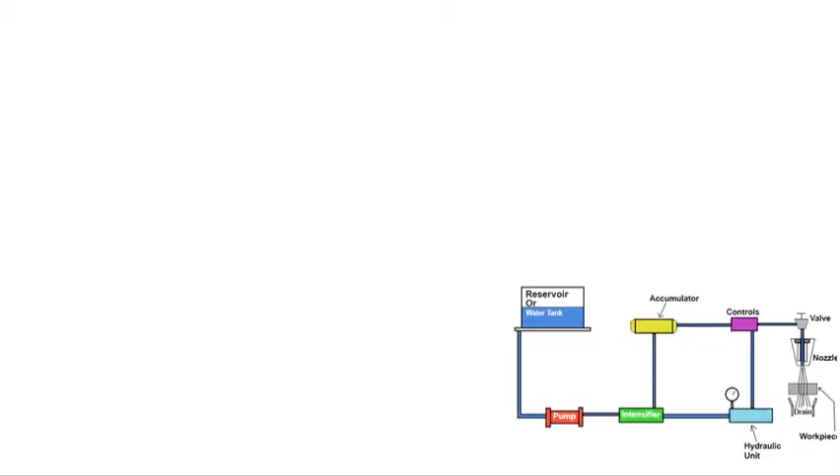18ME641 module 2, water jet machining, short form is WJM. This is lecture series 6.

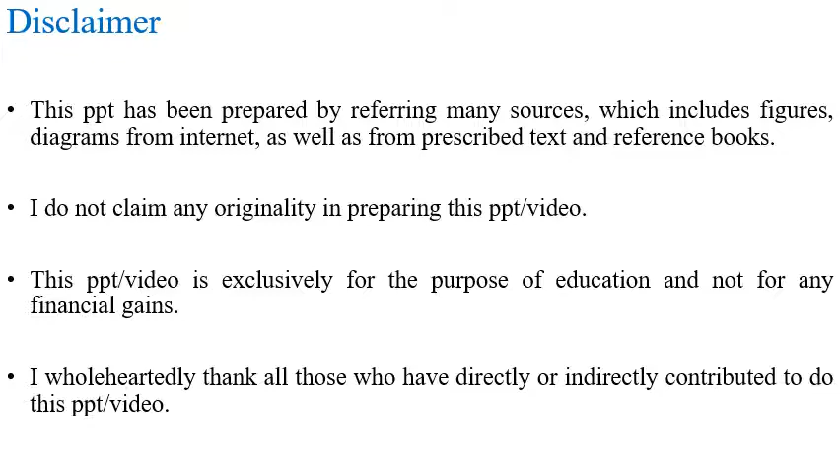Water jet machining. This is the syllabus: equipment, process, operation, applications, advantages and limitations of water jet machining. Water jet machining is good for cutting and slitting of porous non-metals like wood, leather, foam, etc. It is also used for cutting composites, wire stripping and deburring.

This process works on the principle of erosion effects of a high velocity, small diameter jet of water. Quality of the machined edge obtained during this process is usually superior to the other conventional cutting processes. In water jet machining, the water jet is a cutting tool which never dulls or breaks. This process does not generate airborne dust, hence hazards during machining of fiber composites and asbestos are minimum.

The jet velocity may be as high as 900 meters per second. Basic cutting action is performed by the tight water jet core. Interaction with air diverges the shroud around the core. Okay, this is the small introduction about water jet machining.

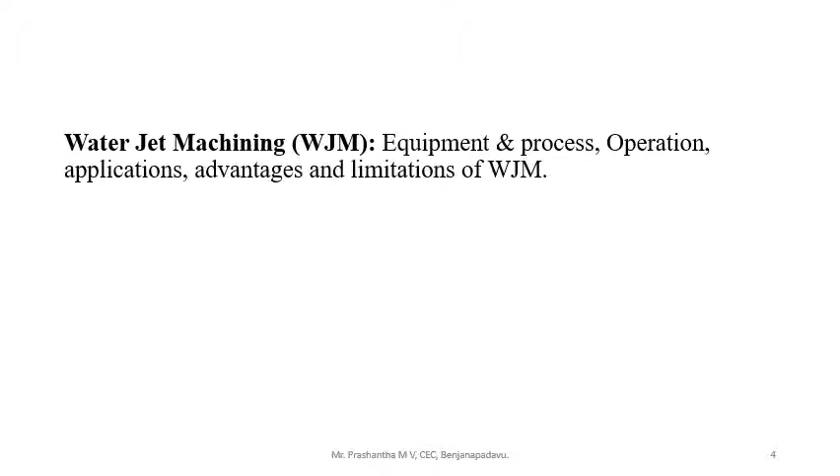Now, before going to the operation of water jet machining, we will move to the working principle of water jet machining. WJM is the short form of water jet machining. WJM works on the principle that when a jet of water at very high pressure and velocity is made to strike on the surface of the workpiece, the kinetic energy of the jet is transformed into mechanical work. The material from the workpiece is rapidly removed by the erosive force of water.

Next, water jet machining is typically used to cut so-called softer and easy to machine materials like thin sheets and foils, non-ferrous metallic alloys, wood, textiles, paper boards, fiberglass, honeycomb, polymers, frozen meat, leather, etc.

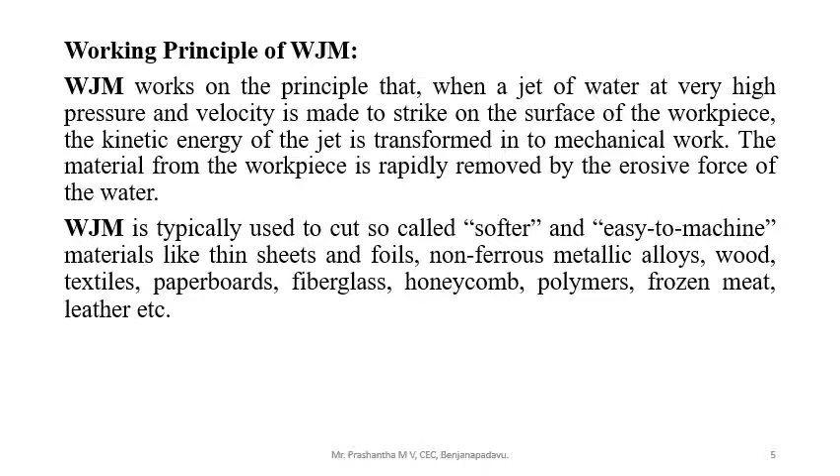Water jet machining equipment. Before going to the equipment, why the need of water jet machining? Although conventional methods can be used for machining non-metallic materials like wood, paper boards, leather, foam, asbestos, fiberglass, etc., they are not technically or economically feasible.

In such cases, water jet machining can be selected since it provides omnidirectional cutting capabilities at very high speeds with a resulting edge quality superior to the other conventional machining methods. Hence, WJM is utilized. This is the purpose or use of water jet machining. Now we'll move on to the diagram.

Water jet machining mainly consists of a few parts or components. They are the pressure generation system. Look at the entire diagram. This entire box is termed as the pressure generation system. And tubing: these entire pipelines are called tubing.

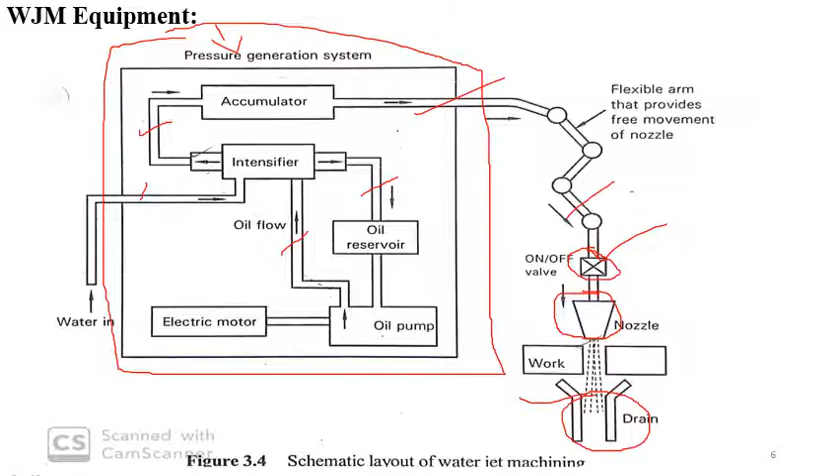And the nozzle is here, valve and catcher. The valve, see here, on and off valve. And the catcher, you can see here. This is the brief list of names of the water jet machining equipment. I will go through the functions of these parts.

First is the pressure generation system. The pressure generation system is the heart of the water jet machining equipment and consists of a pump, here the oil pump, an electric motor, an intensifier and an accumulator with necessary controls and valves.

The pressure generation system delivers a constant and continuous flow of high pressure water at prescribed pressure. Either a positive displacement pump or an intensifier can be used for the purpose. Positive displacement pumps are suitable for low and intermediate pressures up to 280 megapascal, but are less reliable for high pressures. An intensifier overcomes the disadvantages of the displacement pump and serves the purpose. So this is the function of the pressure generation system.

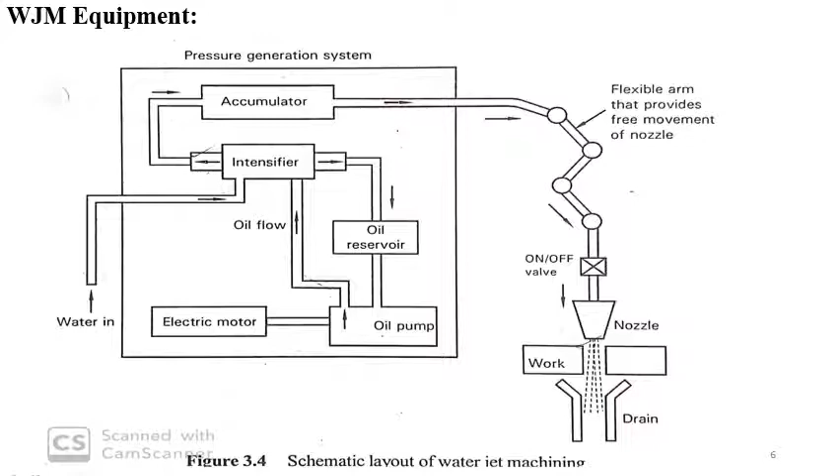In operation, filtered water from the water tank enters the hydraulic intensifier, where its pressure is increased to a high value. The intensifier then supplies high pressure water to the accumulator. To begin the cutting operation, the on-off valve is switched to on position. The high pressure water from the accumulator enters the nozzle, where the whole of the pressure energy is converted into kinetic energy.

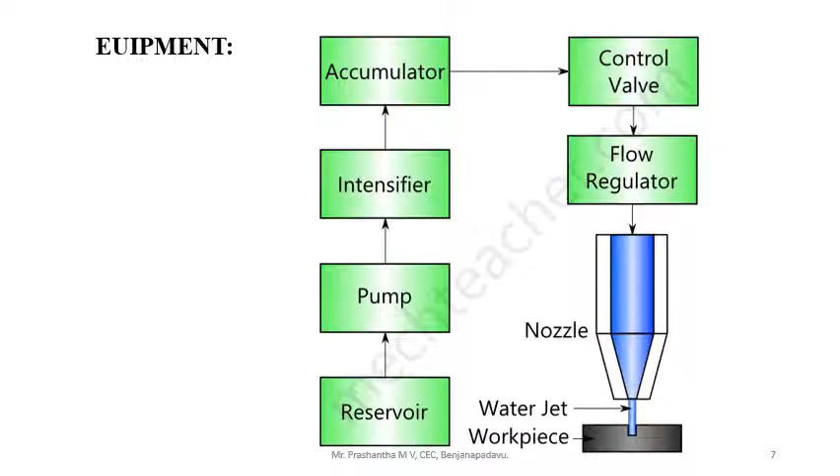The high velocity jet of water forced out of the nozzle is directed towards the work surface. As the jet strikes the work surface, the kinetic energy of the jet is transformed into mechanical work, which removes material from the workpiece by the erosive force of the water. The jet of water after doing work enters the catcher, where it loses its energy and finally gets collected in the drain system. This is the working or operation of water jet machining.

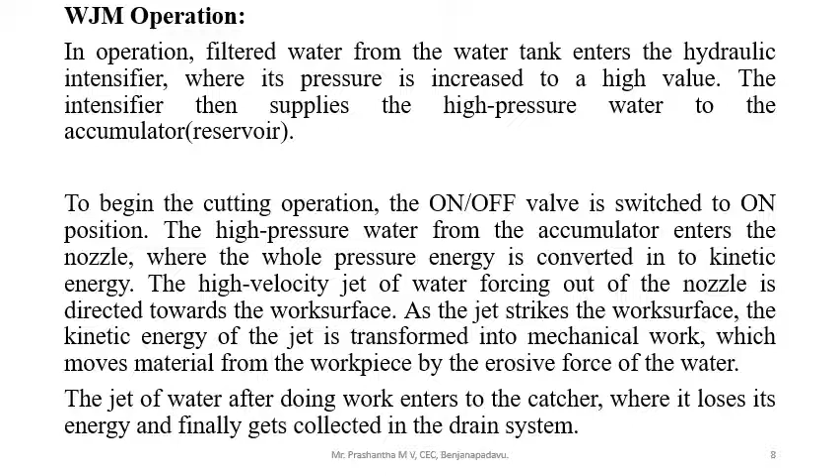Process parameters of water jet machining. The critical parameters that affect the material removal rate in water jet machining are described as follows. Here a few of the critical parameters are there. First one is pressure of water.

The higher the velocity of the jet of water, the better is the cutting action performed by it. Hence, the pressure of the water at the nozzle inlet should be high in order to obtain the high velocity jet at the nozzle exit. Unfortunately, as the pressure increases, the cost and maintenance of the equipment also increases. However, with the maximum pressure of 400 megapascal generated by the intensifier, the cutting action is found to be satisfactory for most of the metals.

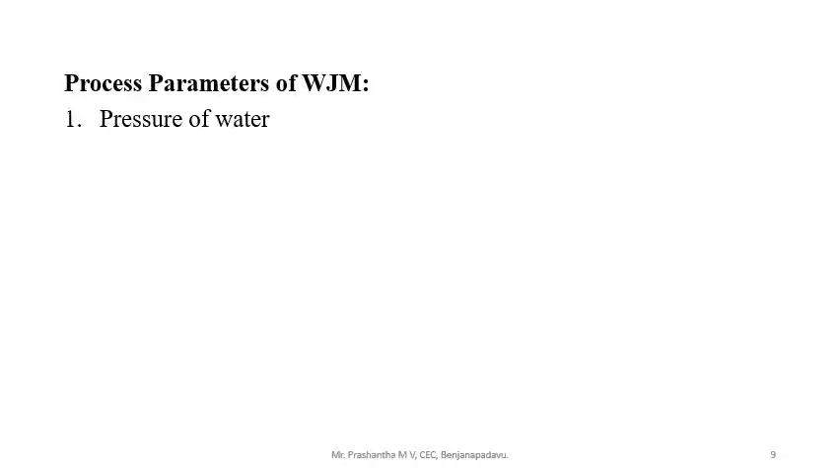Okay. Here the main thing is higher the velocity of the jet of water, better is the cutting action. So when the velocity of water from the jet is higher, the material removal rate is also high. And second is nozzle diameter. Here a nozzle with an exit diameter of 0.05 to 0.35 millimeter gives a coherent jet length of up to 3 to 4 centimeter. A higher value of nozzle exit diameter gives a good metal removal rate.

And third is standoff distance. Cutting is performed with a nozzle to workpiece standoff distance of less than 25 millimeter. A distance of less than 25 millimeter has to be maintained between the nozzle tip and working surface. The standoff distance is not considered as a fixed parameter and varies in different situations. Increase in its value for a particular type of metal and its thickness changes the shape or diameter of the jet, which in turn reduces the material removal rate. This is the brief note on standoff distance.

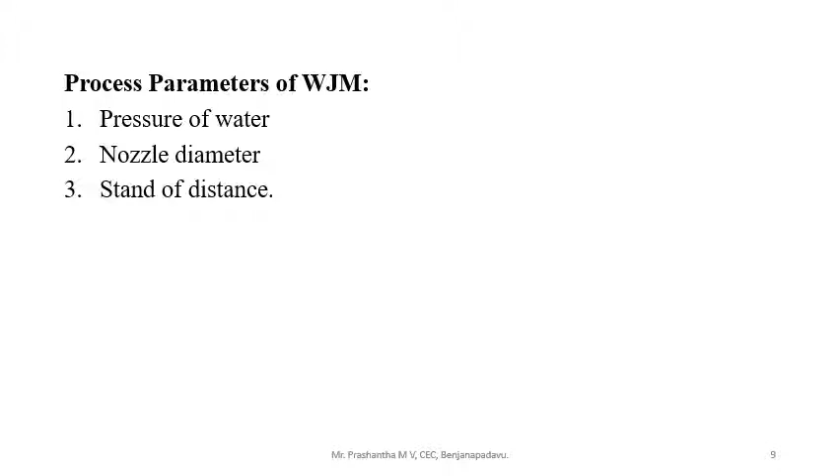Advantages of water jet machining. No heat produced. In water jet machining, there is no production of heat. Cut can be started anywhere without the need for pre-drilled holes. You can start in the beginning itself. Okay, no need of any pre-drilled holes. Environmentally safe and economically friendly manufacturing process. Soft materials up to 250 millimeter thickness can be easily machined.

No noxious gases or liquids are used in the water jet machining. The process gives a clean and sharp cut, and also fine surface finish can be obtained. See here, the soft materials up to 250 millimeter thick. There are no heat affected zones or mechanical stresses left on the cut surface. Okay, this is a very simple operation.

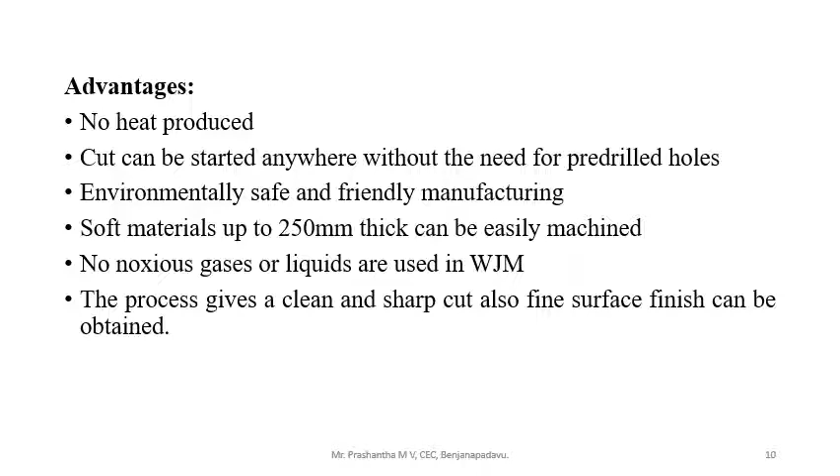Next is limitations. Here the water jet machining equipment is quite expensive, and slight changes in water chemistry can significantly affect the erosion resistance of some of the composites, and it is inefficient for thick materials or thick metals. High pressures and noise of the water jet demand safety equipment for human operators. Because of high pressurized water and noise of water, it demands safety equipment for the operators.

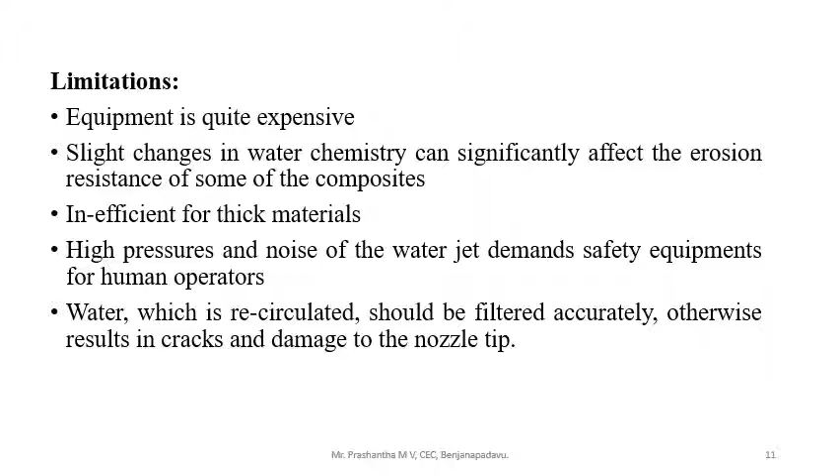Water which is recirculated should be filtered accurately, otherwise it results in cracks and damage to the nozzle tip. See, once the water is utilized, if it is used for reuse or recirculation, the water must be filtered accurately. If you use unfiltered water, it will cause problems associated with the nozzle, like cracks in the nozzle or damage in the nozzle. These are some limitations.

Next is applications. Here several applications are there. Few of them I have mentioned. To remove paints, water jet machining is preferred. Cleaning operation, cutting soft materials, cutting frozen meat, cutting in textile and leather industries. Water jet machining is utilized in the textile industries and leather industries. Mass immunizations, surgery, peening, cutting, pocket milling, drilling, turning and nuclear plant dismantling. These are a few of the applications.

I will add few more. Used to cut non-metallic materials like glass epoxy, graphite, boron, fiber reinforced plastics, corrugated boards, leather and many other brittle materials. And one more, used in aircraft industries for profile cutting of fiber reinforced plastic components and other parts. It is also utilized in mining and quarrying work, for instance in cutting tunnel profiles prior to drilling and blasting. Removal of surface irregularities or burrs in workpieces.